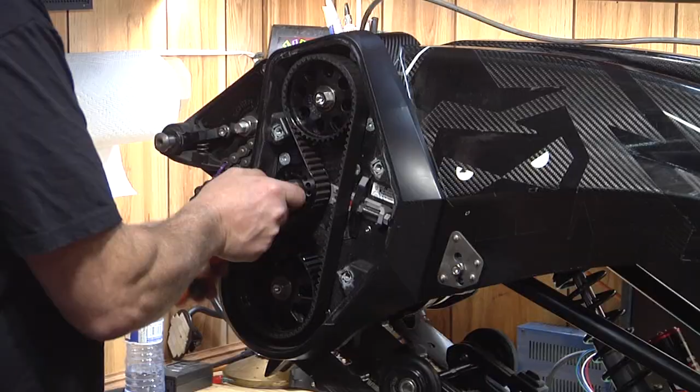Loosen the nut on the wheel. And then with our 12 mil wrench, loosen off our lock nut. Okay, I just had a crappy wrench there, guys. And then back this off, loosen it up. Okay, and now we can slip our belt off.

It's a great time to inspect the belt. So, just kind of having a look over it, making sure there's no cracks. And then the inside, no abnormal wear on the ribs, all that stuff. Yeah, so we're looking good. That's good.

Okay, now besides whatever the chain is keeping on tension, this will pretty much freewheel. So with that sitting like so, we're going to put on these clamps. The great thing about these clutch basket clamps is they do fit in well. You don't want to over tighten them. You just want to hold it in place.

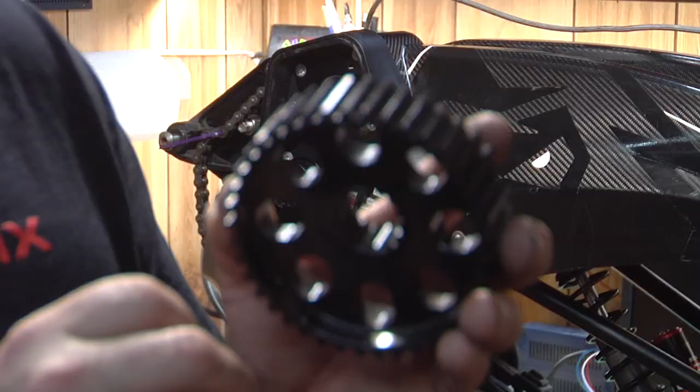When it's not looking good, the teeth start to spur a little bit, and on some of these, it's not painted, I can't remember the process, but you'll see it starting to wear down. You'll start seeing the aluminum coming back through. Yeah. So, but it looks great. It looks perfect. So this can be used again.

I found an old sprocket here. I want to kind of show you guys what a worn out, not fully worn out, but signs of it breaking down or having issues looks like. I hope this camera can pick it up. You see all the divots and the scrape marks and everything on this thing?

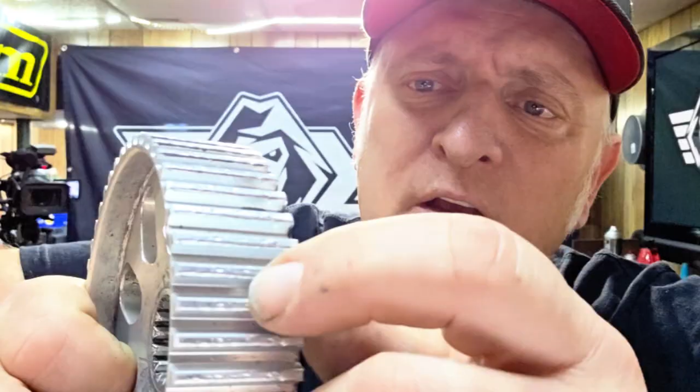So either something got in there when I broke a deflector case, or back in the day when they used to make them not as durable as they do now, or when I used to smash and bash through rocks when I probably shouldn't have. I got something in there between the belt and the pulley, and that caused a little bit of damage.

So, would I use this again? I would, if I were to clean it off and make sure that there were no rough edges to cut the belt or do any damage to the belt. The belts are expensive and they're proprietary, but that's definitely not how it's supposed to look. It should be smooth and perfect, like the black one I showed you earlier on.

So the next step here, guys, is we're going to use this special Yeti puller, put it on here, and that's going to help separate the drive plate, I think it's called, from the body. Before we do that, we've got to take all the drive plate screws out. There's 1, 2, 3, 4, 5, 6, 7 of them. So let's get them out. And chances are they're Loctited in as well, so you might have to heat them up.

I like to try to loosen everything with a ratchet before I get my power tools in there. The power tools are nice. They make things go fast, but they can also strip pretty easily and cause damage if you're not careful. And just to get it out of my way, I'm going to remove my tensioner wheel here.

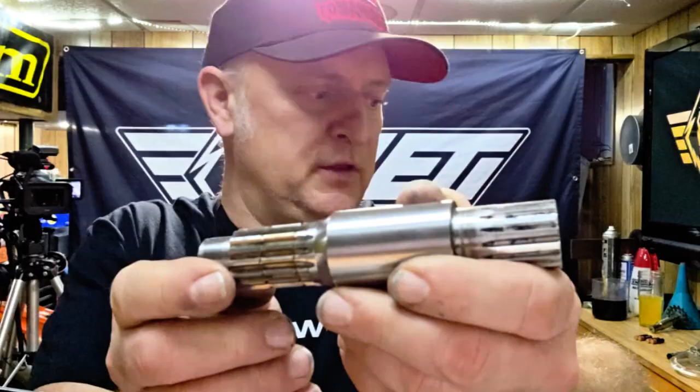Okay. All right. So now we're ready to pull the plate off of the actual jack shaft itself. The bearing is pressed onto the end of this shaft here that goes to the outside, and it needs a lot of force to get it off. So you can't just loosen the drive plate and expect to yank it off the shaft.

Okay, so this is what the puller looks like. They do show this on the YetiSnowMX video page I was talking about earlier on, the older one, and they do show you how to use it. So if my instruction isn't quite floating your boat, you can always check theirs out.

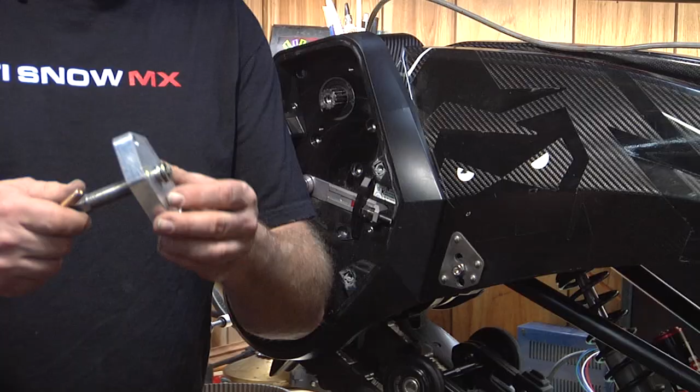So the way this works, guys, is back off your adjuster almost all the way, or not quite. Make sure that you've installed the little bearing system on the end, along with that little 8mm bolt head. That's just so when you turn it, it doesn't grind into the jack shaft, and it'll actually kind of spin and make it a little bit easier for you to work with.

And then take two of your shorter bolts here, like so, with the two holes that are threaded in there that don't hold in the bolts that hold in the drive plate, the one above and below on an angle of the jack shaft. You want to thread these bolts in as far as they'll go. Basically, we're bottoming them out. Okay, and now that's done, we got a little bit of play here.

Just tighten up your adjuster, and then with the appropriate socket, in theory, we should just be able to crank on that clockwise, and it should start pulling the drive plate off. Here we go. There's gonna be a lot of cracking, a lot of popping going on. It's okay. And like so, the drive plate is off and nothing's damaged. All is good in the world.

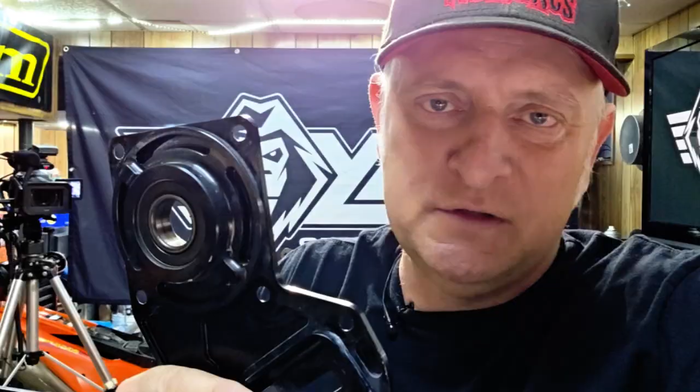So talking about a visual inspection, I'm looking at the black seal on the outside. There's also another one on the other side. These are supposed to be waterproof bearings, so if snow and stuff gets in there, it doesn't rust out the bearings. They're already pre-lubricated. And then I'll stick my thumb in there, and I'll rotate it, and I'll listen and feel if there's a grinding sound or a grinding feel. It's perfect. It's good. If there is none of that, you're good to go. If there's some of that, you're not so good to go.

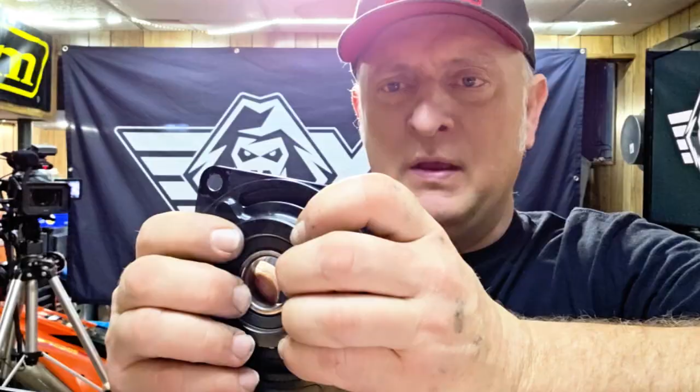Obviously abnormal wear and play, but if you were able to get play out of the center of this bearing, chances are it's making a lot of noise. It's really hard to spin. So super smooth rotation and no grinding or any type of chunk feel to it. So we're good to go. That bearing should be fine.

If you were to replace the bearing, it is kind of pressed in there, guys. You could probably put it in a vise with some sockets and press it out, but you'll need to remove the circlip that's in there. You just need some circlip tools, but that's not for this video. And there's tons of videos out there where you can find out how to pull a bearing from something.

Okay, so what we're left with now, guys, is the jack shaft just hanging there in the carbon fiber tunnel. Yeah, there's quite a bit of play on that sprocket. Like in our other video, this sprocket on the jack shaft shouldn't have any play, and it's going knock, knock, knock. So it is a wear point. I have three Yetis now, a 16, 20, and a 22, and they all kind of do that. It's like the sprockets on your dirt bike with your chain. It's just going to wear out.

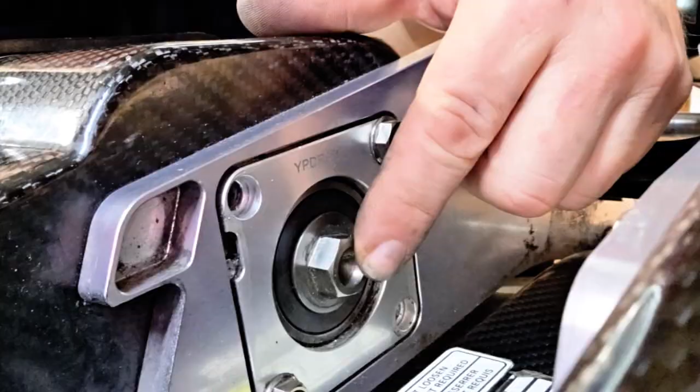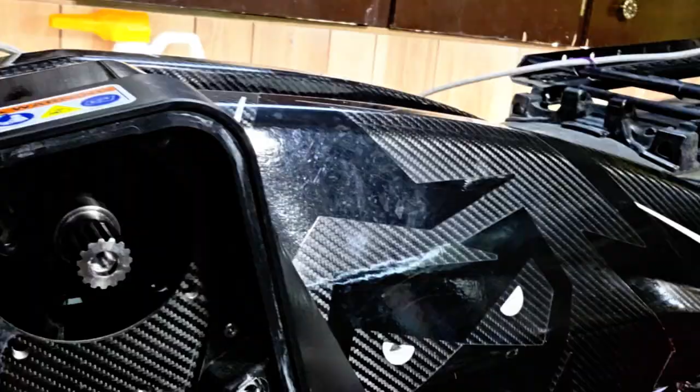Okay, so we have found our first problem. Theoretically, when we've got the nut here on the inside holding the jack shaft in place, and the chain's off it, so there's nothing binding anything or holding anything together, that in here should rotate quite easily, with no effort. I'm having a really hard time rotating that. And that should not sound like that. So we have a problem.

Now, it could be a couple different things. Without a flashlight, I'm not going to be able to see. But we could have a bad bearing. Maybe a clip has fallen off, but it kind of feels like a bearing. You can hear all that rattling. Hear that ringing noise? That's how loose that sprocket is on the jack shaft. So that doesn't help at all. I think the bearing's shot.

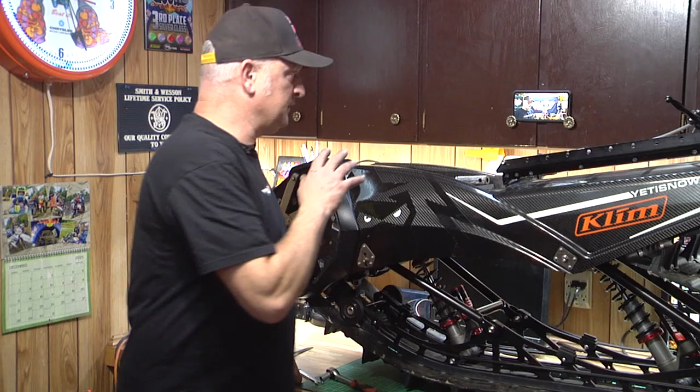So we still need to hold it in place to get the bolt off. Okay, so after a bit of messing around here, I have been able to kind of figure out how to do this and start to break it loose. So I definitely needed to get myself a longer breaker bar, and then putting one of the belt sprockets back onto my Motion Pro clutch basket holder. I took the Motion Pro and I put it about there so I can get a good hand on it.

Being careful that when I start loosening the other side, I'm not pinching my hand in the system here. And then getting this in a good angle off the back bolt. And then doing my best to hold on to this thing. Yeti t-shirt, give me strength. Okay, and there we go, guys. So that's loose to the point now where I can definitely put it on my other ratchet and get that bolt out.

You can tell it's Loctite. You know how you get that feel, like it's tight the whole way out. That's Loctite. Now, because I think I've discovered that this bearing is shot, I could have probably thrown some heat on it, and I might have not needed the breaker bar. But I like to pretend the bearing is actually in good shape. And again, if I were to apply heat to it, it probably would have warped the outer seal and caused it to leak, get moisture in there, rust out, and bad things happen.

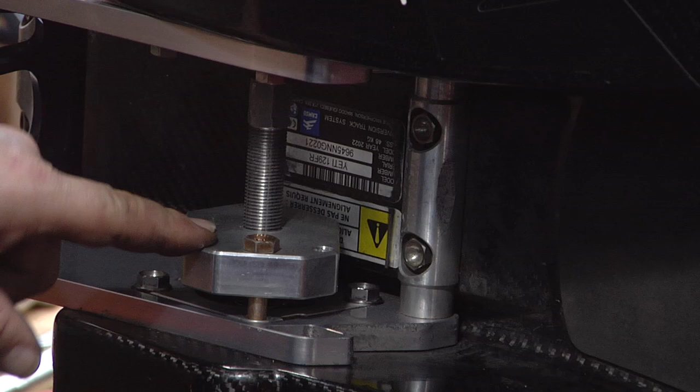Okay, so we're out. So now we get that off. Let's pull this back down. We're now going to take our puller / pusher and get it into place here so we can push that jack shaft out of that bearing. Okay, so now that I got that in there, I'm basically just making sure that the removal plate is pretty even. It's not crooked or anything. It's in there nice. Then I'm going to tighten this down. And then with a 16mm wrench, I'm going to push that shaft out.

Again, there's going to be a lot of cracking noises. It's all good. At least the cracking noises that you're hearing in this video. And you'll know you have it out when the jack shaft just falls out the other side. Okay, I heard it drop. We can remove our system here. Okay, so instead of, yeah, look at that, eh? All right, let's stand this back up.

So instead of just pushing the shaft off the bearing, it pushed the bearing out of the holder. And it's quite clear that with the rotation of this bearing, it is totally and utterly done for. So the next thing we have to do is focus on getting this bearing off, and then taking this apart if we want to is fine. But I need the circlips that are in here. There's these tiny little circlips right there that hold this gear in place. I need those clips. So in order to get those clips, I got to take the bearing off.

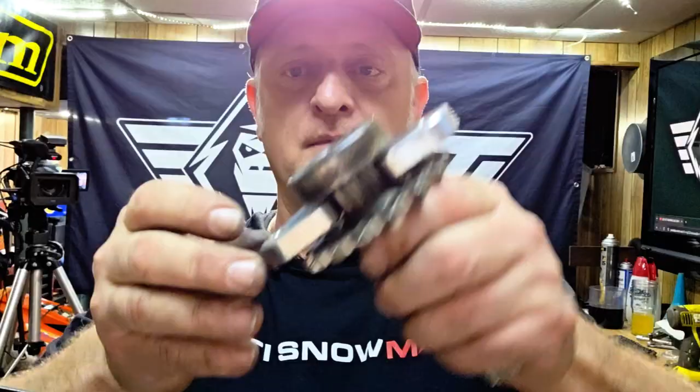In order to get the bearing off, it's pretty simple. With your Yeti bearing puller kit, you've got this little piece, and it's pretty easy. You're just going to put this piece underneath the bearing like so. Okay, and then the other piece on top. Now this is where you're going to need the long bolts. These short brass bolts won't cut it. You get the 2 long bolts that came with the kit. Put them through like so. Thread them into the base.

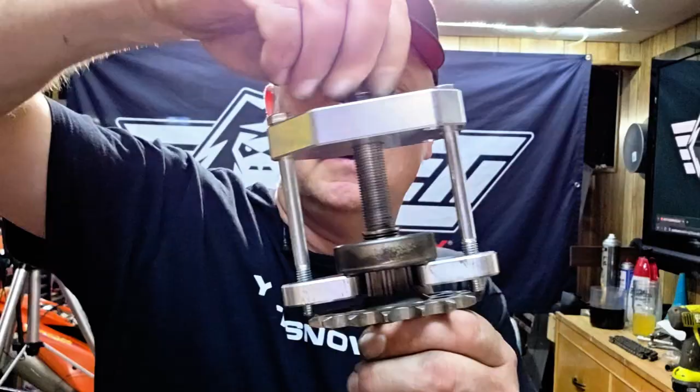I'm going to go all the way until they start popping out the bottom, or flush with the bottom, like so. Okay, and then it's a simple, actually I'm going to go further. You can't go too far because it just hits the sprocket. And then this has to get cranked up all the way. And once that's snug, now all I got to do is tighten this and it'll pull it off. I should be able to do it just by holding on to it. So let's give it a whirl. Here we go.

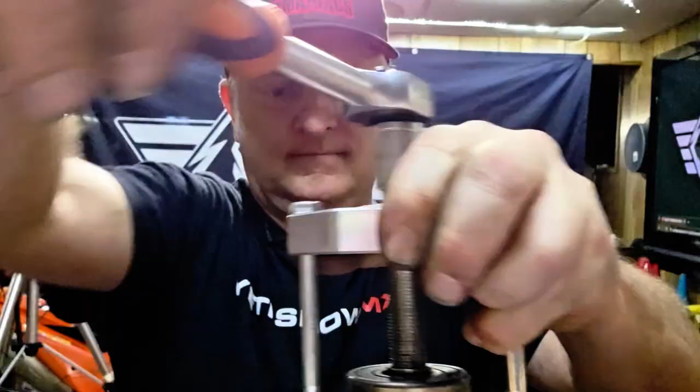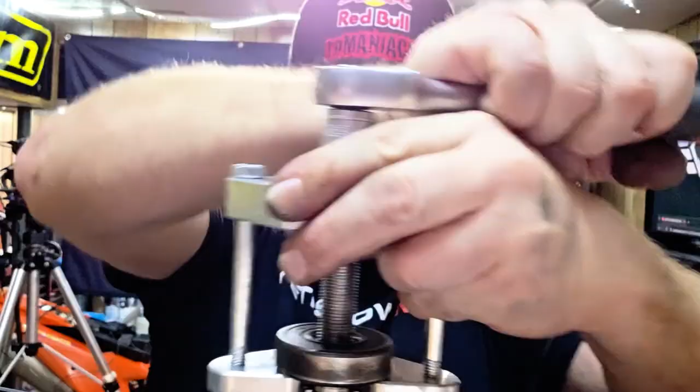Oh yeah, that works really good. Look at that. Oh, I've run out. Okay, so I've just run out of shaft here, so I just got to do a quick reset. So just back that off. Tighten up your 2 bolts on either side again. As far as she goes.

And the bearing's off. Easy peasy. Okay, smart tools from Yeti. Yeah, now I can really feel it. So it's totally, you know, grinding. So that bearing's shot. So we've got to put a new bearing on. Let's get the sprocket off next.

Okay, here we go. Just got these brand new. Can't wait to try them. My other ones were bending. Oh, how good does that work? Yes.

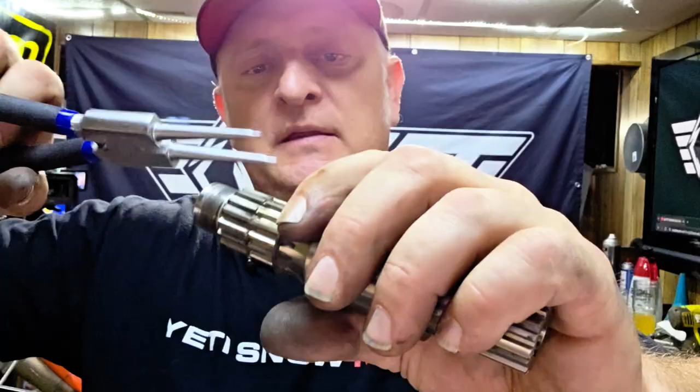Okay, and then sprocket off. So yeah, there's another retaining clip on the inside that stops it. You're going to want to take that one off as well. Inspect them, guys, but they shouldn't be damaged. Yeah, it's straight. It's good. No problems. And now this sprocket and this shaft is pretty much kaput.

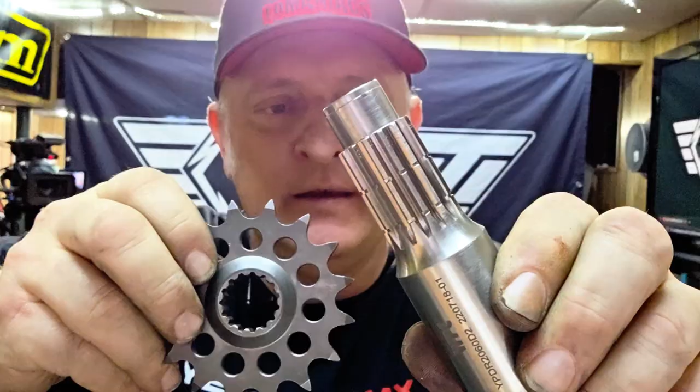All right, so now we've got our new jack shaft with our new sprocket. This is the second one I've gotten. The first one, I was actually able to marry up the sprocket quite nice, and it had pressure to slide on, but not as much as this one's giving me. I'm not sure why, but I do know that the tolerances are super tight, and it's going to take a little bit of effort to put it on.

But you need to keep it dry, because in the YetiSnowMX manual, they say that you need to apply some sleeve retainer compound. Now they put a Loctite number in their parts fiche, parts diagram manual. But if you watch our other jack shaft video, we explain that this is the equivalent. So if you can't find the Loctite, whatever number that one is, it'll show in the manual, this Permatex sleeve retainer, PX64050, will do the trick.

So before we apply that, we've got to take our circlip and put it on the first ring. Now the old YetiSnowMX video, if you're watching online, they say there's multiple grooves. It doesn't look like that's it anymore. There's two of them. One goes on the bottom, one goes on the top. Make sure that it seats in the ring. You know that it's in there because it'll spin smoothly in the channel that's meant for it.

So now we've got to get this on. It's the first time I've come across trying to put a sprocket on where it's been difficult. So I think I'm just going to try to get it as level as possible. The way I'm going to do it is put a big socket on the top while I hold this down in the vise with some soft jaws and tap on it evenly to get it to go down even, instead of hitting one side, hitting the other, and rocking it. I think that would just wear out the splines prematurely.

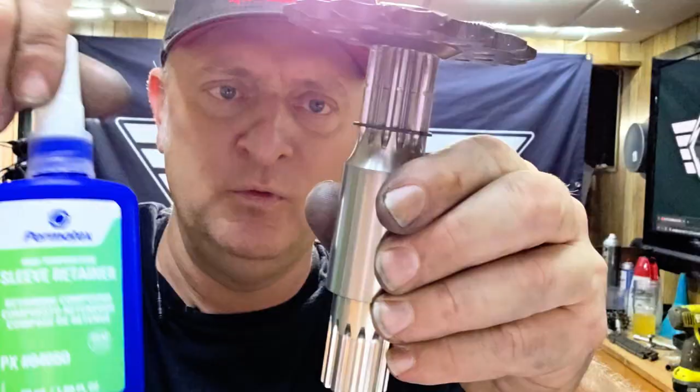Just before I get it into place, I'll apply this sleeve retainer to the inside. In this case, because it's so tight, I'm going to soak it, really get it in there. Okay, so I've got the sleeve retainer in there, it's dripping. I'm going to let it try to flow down through the channels a bit, see it pooling. Get it in there. I'm going to add a little bit to the top. See if I can get it to start seeping its way down.

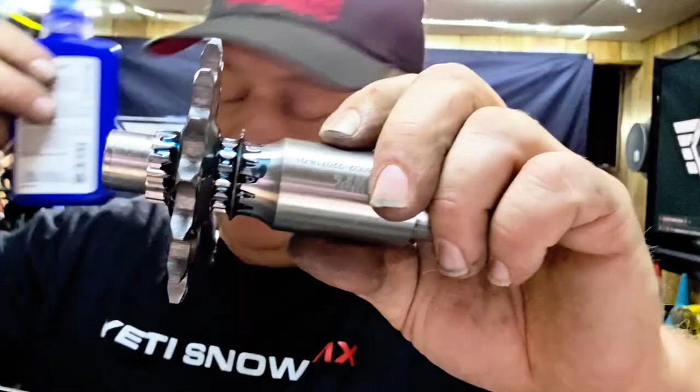I'm not quite in all the way, far enough, but I'm damn close. And I want to make sure this stuff's in here. So I'll use a little bit too much because I'm never going to use it for anything else, and then I'll be sure that it's in there and it's working the way it should. Okay, so we're looking good.

Now I know I'm in place because I can see that the gear is perfectly married up at the bottom of the circlip. So now all I should have to do is get this other circlip in place, get it back in there, push it down until it clicks into place, and I can feel that one spin on there nicely. Ever so evenly. And now, zero play, nice and tight, ready to get put back on the machine.

Okay, so for the units that require the alignment, don't quote me on this, but I've got a feeling it's 2018 and up. Maybe some later production 17s, but I think it's 18 and up. That's when you have the floating bearing system or the alignment carrier. I'll show this to you guys. Let's see if I can get this.

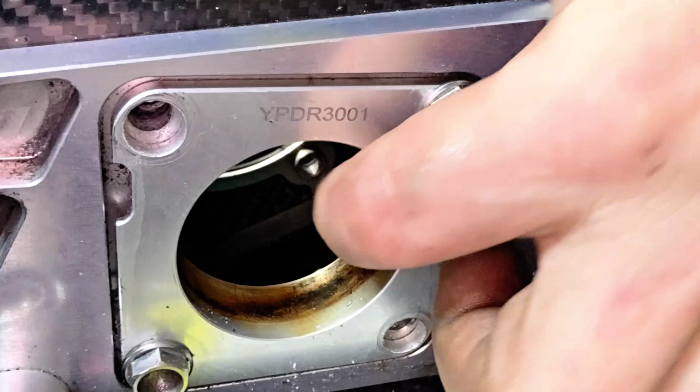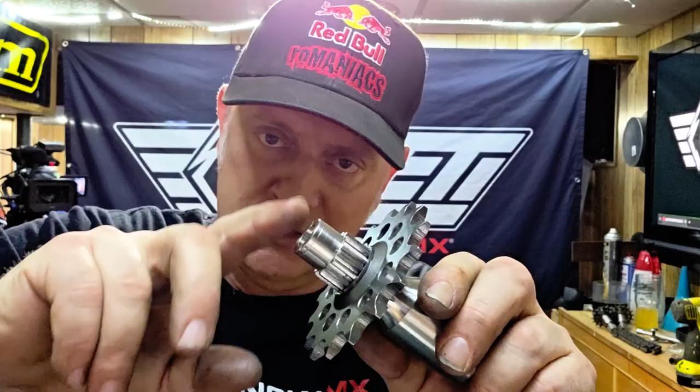Okay, so this housing here for the bearing, in older units there was a sleeve at the back that would stop the bearing from pulling through. So when I pushed this through to release the jack shaft, obviously the bearing came with it. Because I can't find any videos online that reference that, I'm going to assume that I need to install my bearing on this shaft first, bottoming out on this lip, and that's exactly how it's supposed to sit. This definitely seems like it's the perfect length to fit inside of the replacement bearing.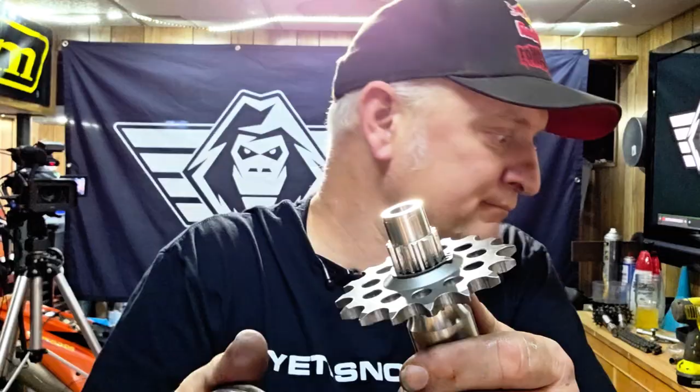So yeah, we're going to find a bearing in the kit that's new or good. And if I was spending a lot of time doing this, I would try to make the job a bit easier by putting the bearing in a warm place. Not too warm, but somewhere nice and warm. And put this in the freezer. The freezer will cause this to contract, get a little bit smaller. And then the heat will help this expand a bit. I'm not going to say it's going to drop on, but it makes it a little bit easier so you don't have to apply so much pressure to the inner side of the bearing.

We don't have time for that. We're making a video. We're going to just apply the pressure. Let's go. Let's get this bearing on the shaft. Now, there's a couple different ways you can do this. My vise is long enough where I can put both ends of these in, and the vise can squeeze, and it'll move this bearing here over and fill that gap in.

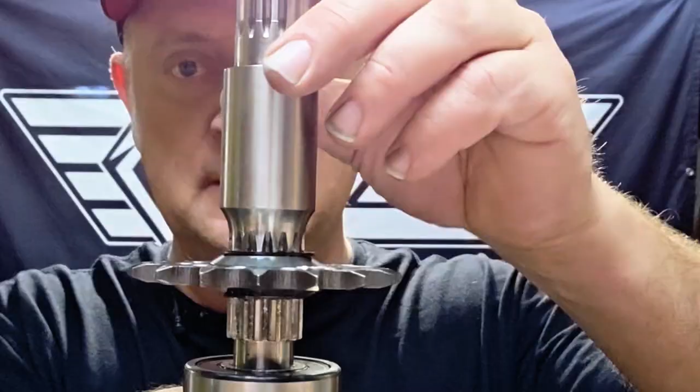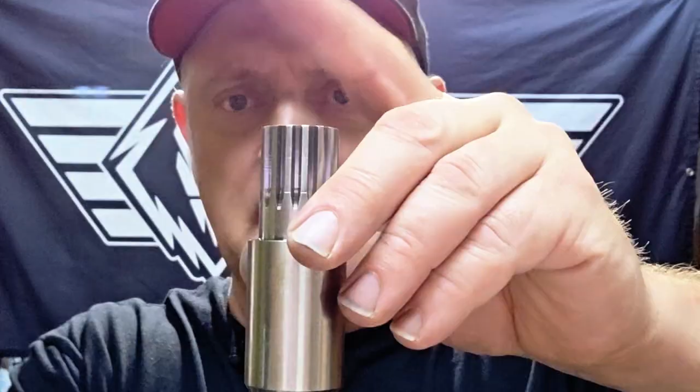If you don't have a vise that's that big, then what you can do is put it on a table like so on this flat end, maybe a block of wood on the top, and just start knocking this down. And with the levelness of the table and a good enough piece of wood and a nice swing, it's going to tap, tap, tap, tap, and push that bearing up into place.

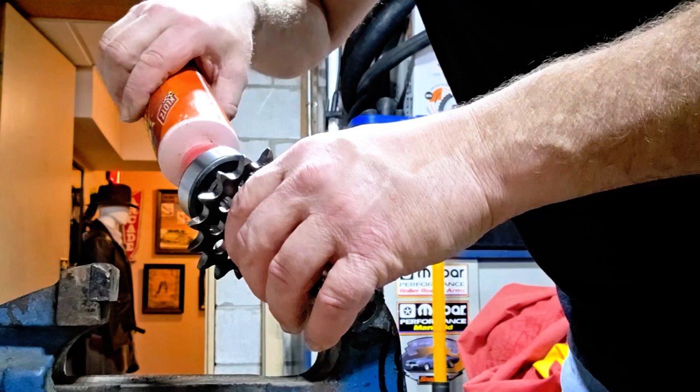So before I put this on, you don't have to do this, guys, but I like doing it because I think it's good practice. I bought a little bit of this Klotz assembly lube that I've had for a while now. I'm going to put a tiny little bit of it on the inside of the bearing and around the shaft here. It's just going to allow it to slide down and find home base a little bit easier than just metal on metal. All right. So it's lubed up nicely.

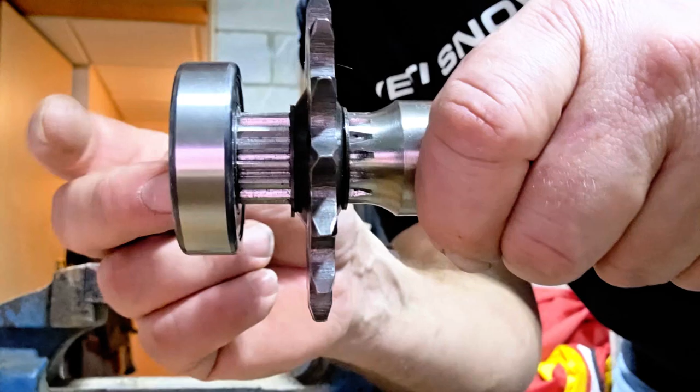And in the vise it goes. And in theory, as long as everything's straight, that vise should just push that in nicely. Yeah, that's what I want to feel. I'm just going to bottom the bearing out a bit. And now the bearing is installed and in place. So I'm putting it all the way to the edge of those splines so it can't go any further. Not squeezing too hard. So let's head back in.

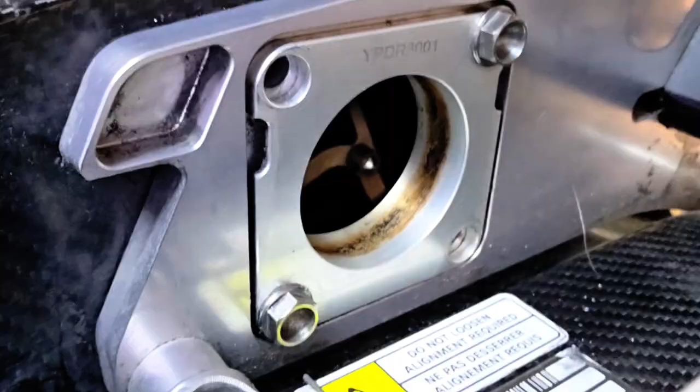So now that we have that in there, I'm going to wipe off the excess oil and we're going to get it back into place. Okay, so before we put it back into place, which is basically inside of that bearing carrier, I'm going to try to clean up some of that dirty rust that's in there. And before I try to put it in, I will need to put both these bolts back in. There will be some tapping going on to try to get this to go into place, so I want this securely mounted against the tunnel. Once the bearing's in place, we'll take this off and then we'll put in our shims and take care of the alignment process. All right, let's get this cleaned up.

I'm going to try a brake cleaner and a little bit of emery cloth. You don't want to score this. I'm talking really soft stuff. Hopefully just my toothbrush, but if that doesn't do it, it might take a little bit more. I've just taken a little bit of basically wet sandpaper. It's the stuff you're supposed to wet when you're doing that final clear coat on your car, or whatever you're finishing off.

It's extremely not abrasive. It probably won't even cut into the aluminum. It's just enough that it's taking off some of the surface rust. It's not taking off any metal. It's just cleaning it up so that the bearing will slide in nicely and seat evenly. Now this bearing doesn't need to be pressed into this hole. This hole is just machined enough that I can almost get the bearing in with my fingers. But it stops about halfway through and there's too much friction.

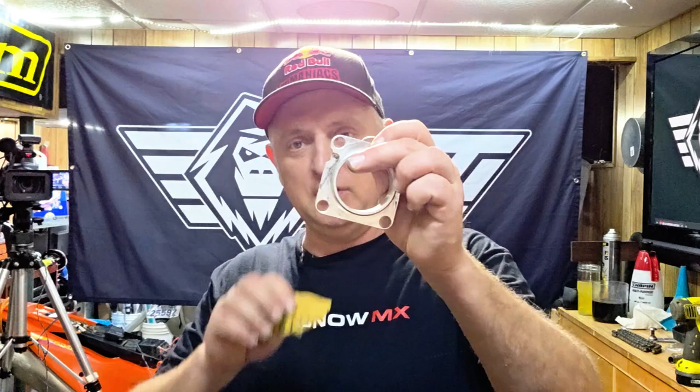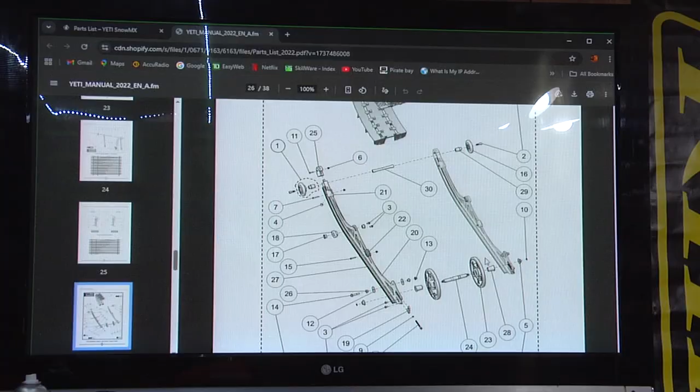But when you put the jack shaft on and start pushing it or hammering it through, it will seat nicely. The trick is not to go too far. You want it so the bearing marries up perfectly in this casing. We're just going to check the manual to find out if the bolts that hold this, let's call it the bearing carrier, in place need Loctite or not. All right, so just finding the correct page. Okay.

Yes, it definitely wants Loctite on those 4 bolts. And again, there's that symbol for that Permatex stuff that I was using. In this case, I'm pretty sure this tells you on the top what Loctite it is. Apply Loctite 648 to splines. So I just used the other stuff. So yeah, blue Loctite to number 17. So I'll do that. I'm going to clean the threads off and get them all good to go so that the Loctite can do its job, because these threads have a bunch of gunk in them still from the old Loctite.

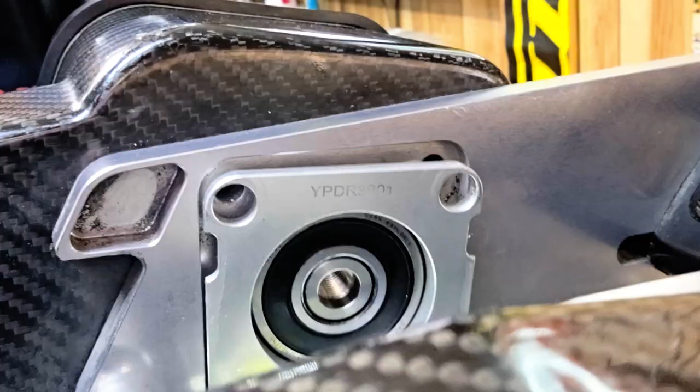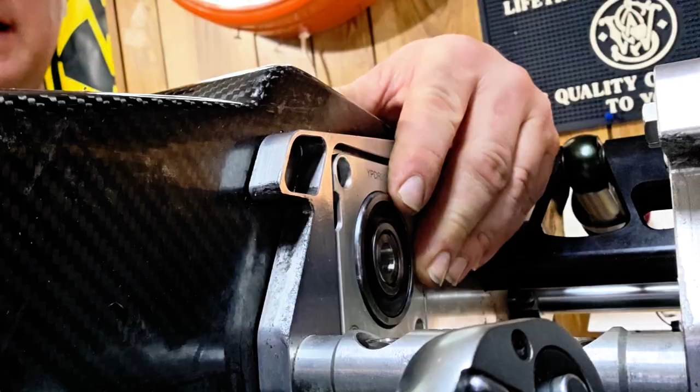Okay, so sorry I didn't show that on film. Well, I kind of did. It went in quite nicely. There was no effort at all. I just pushed it in, and that bearing fell right into place, and all is good in the world. So let's talk about what we have to do now before we mount this plate in there. I wish I could get a better angle of that. That floating bearing works, right? But this whole plate moves up and down, and this is what's going to help us align it.

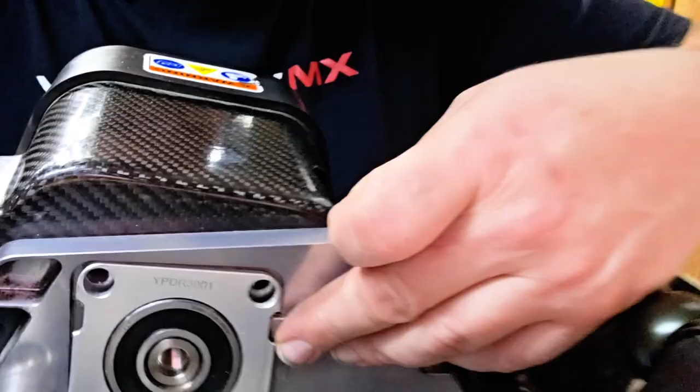So before I put the bolts back in, there are a set of very small wedges. Excuse the dirty hands there, guys. There's wedge number 1, and then there's another one that's identical. And each one of them fits in a side here, like so. They fit in behind, right? And these slots here will eventually help us set these into place. So I've got to refer to the instruction manual again to make sure I get this right, and I'll tell you guys on video how it's done in a second.

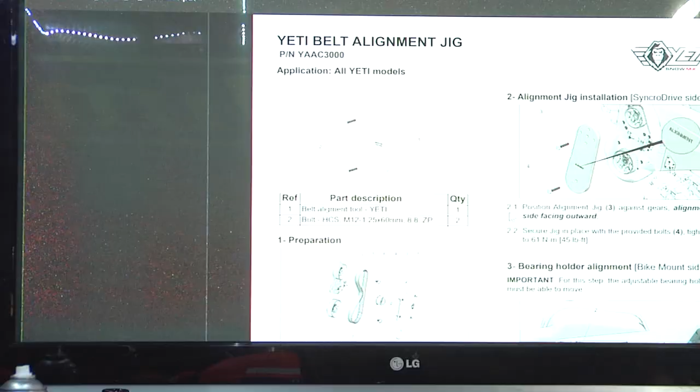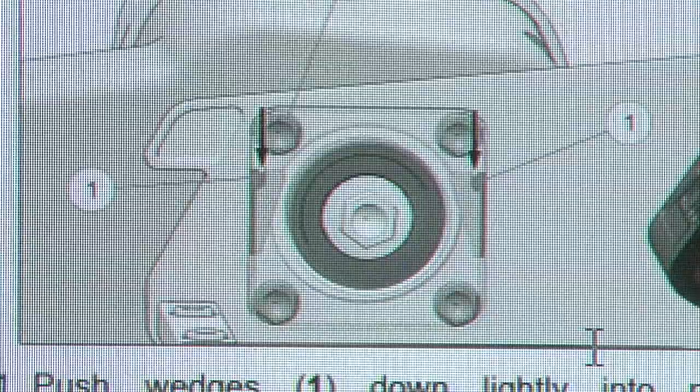Okay, so you're going to need to have on hand the tool that they call the belt alignment jig. So we'll click on that. It's this huge piece of machined, I think it's aluminum, that you use to align the belt, align the jack shaft, and it shows you these illustrations here of how the pins go in, how they work and how it lines everything up. So I'm just going to have a look over this, and then I'm going to spell it all out for you cats.

Okay, we're getting close to doing the alignment procedure. Let's show you what the alignment tool looks like. This thing. It's made to perfection. It's made by YetiSnowMX, and as you'll see in the steps, I'm going to explain how to use this. This will align your 2 drive belts. Picture a drive belt here. You can kind of see the sprocket, one here, one down here. You mount this on. There's a bunch of different steps, and it'll move that top jack shaft up and down where it needs to be in order for it to align perfectly.

And then those wedges that I was showing you earlier, the purpose of these is while you move that plate around inside the carrier, up and down, sideways, as it finds home, the wedges will slowly drop and slip and fall into place on either side. Then it will find its perfect alignment spot, and then you tighten everything up and you're good to go. Now, you do not want to add any lubrication at all to this. Any lubrication will cause these to stick.

You want it totally bone dry in there with no lube so that this aluminum can slip up and down easily into place. If you were to have any type of dirt in there, you could definitely use these little pin holes in the top to put a poker in to help push it down once the whole thing's aligned and jigged. But I'm going to leave it not lubricated and allow them to slip and slide inside as easily as possible, so the oil doesn't hang it up against the side of the wall and stop it from slipping into place.

So this is where it gets a little tricky, trying to get everything lined into place. We're going to get the 4 bolts started in here, and we'll be right back with a camera shot. There's a backing plate in there. Don't forget this. That goes up against the back inside the tunnel, right in here, all the way in there. And that's what the screws hold on to, these little aluminum sections. I know some units might have a different look to them, but this one here is slightly tweaked. It's not ideal. Should be okay.

So I'm just starting the bolts a little bit, just so a few threads are holding on until I get them all 4 in place. Okay, now that I got some tension, just a bit of tension on those bolts in the plate there.

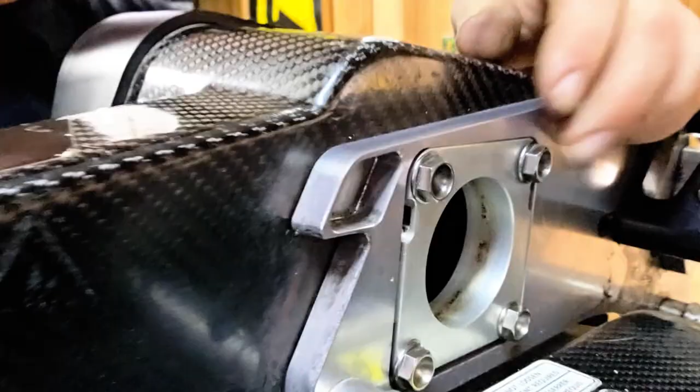Okay, here. I'm actually going to lay it on its side, and I'm going to take a little poker and try to move those sliders up inside and put them up a little bit higher so that they can do their job with the alignment jig. This has become one of my best tools I have in my box.

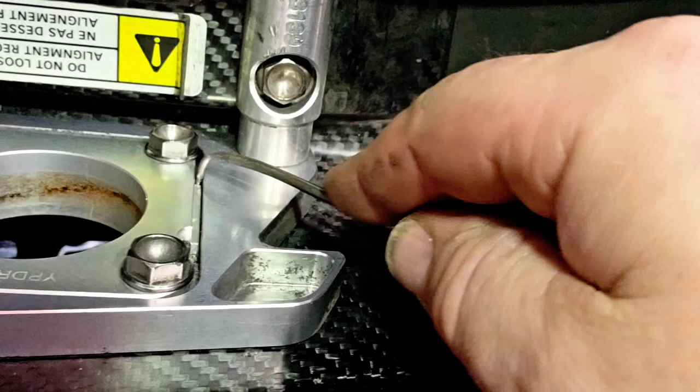And then, let's see if you guys can see this. And take these, slide that one up into place. That one, slide that up into place. I hope you guys could see that, what I did there. So these go up and down, right? The wedges, they help it find a home. Should have done that. There.

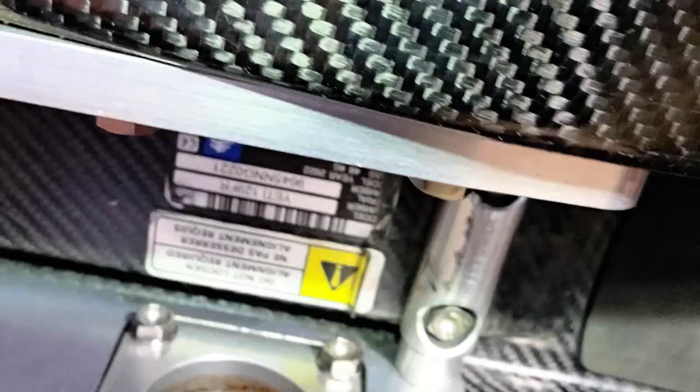Okay, I'm going to start them in the top position. And then all I'm going to do is I'm just going to snug this down to hold those in place until I get my jack shaft in there. And then we'll loosen and then put the alignment jig on there. So that way it holds those little pins in place while I move the kit around.

Well, I guess with it tight in there, it's definitely closed up the gap a bit. Oh, no, there we go. Okay, perfect. Never mind, didn't say a word. Okay.

I'm going to take my bolt and I'm going to secure it to the back of my unit. Of course, with the Loctite that it recommends. Yes, Loctite at 61 Newton meters, that's pretty tight. We'll torque it up after, but we'll get the Loctite in there. Okay, and then in order to get it to 61 Newton meters, I can probably do that with the alignment jig. Yeah, we'll wait till we get the alignment jig in place.

Okay, since we took the chain off, now is a great time to reinstall the chain while this drive plate's off. It'll be so much easier than trying to do it afterwards. It's such a pain in the ass to get these chains on sometimes. So we'll just feed it on now and life will be so much better. That's how it was supposed to spin in the first place.

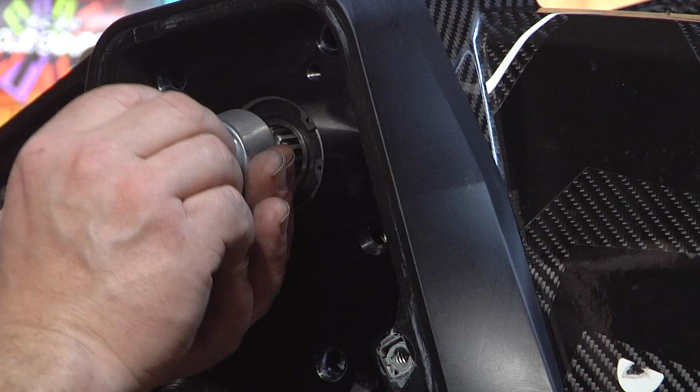So in order to get this pulled back through, basically the way that this tool works is we put the nut first on the bolt, like so. Okay, then the washer, then the collar, like so. Okay. And then on here, the drive plate's just resting there without any bolts in place. We're going to thread that in.

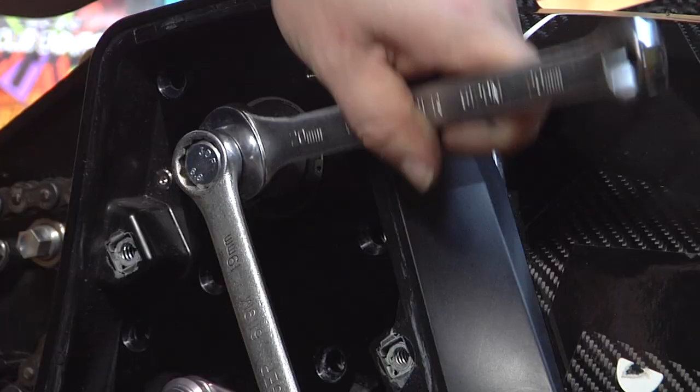And then basically when we tighten the nut and hold the outside bolt from rotating, it's going to pull the whole thing together through the bearing. Like so. We're just going to hold this side while we tighten it in. So I'm just going to loosen it to show you the progress so far.

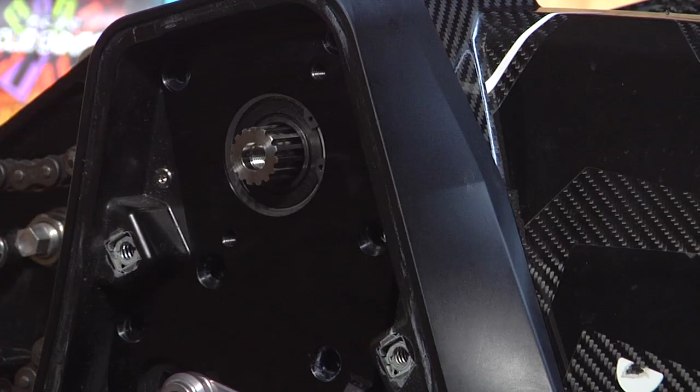Now as you can see, it's starting to pull it through the spline. So it's doing it nice and evenly. And just so you know, that bearing will eventually bottom out on this side of the shaft, up against there. Okay.

Okay, so it's gotten tight. It's definitely bottomed out. And the way that you can double check that it is sitting in the right spot is if you take your belt sprocket here along with your washer that goes behind it. Don't forget that. And then put the drive gear on. It should be perfectly flat and flush with the gear, so that there isn't any sticking out and it's not recessed in. Again, this is that fine machining that I was talking about in all my videos about YetiSnowMX. Really great stuff. You put it together properly, everything works properly.

Okay, so now that that's done, we can install our drive plate back into place. And the drive plate screws are going to be 25 Newton meters. I'm going to stagger them. And now it is time for the alignment process.

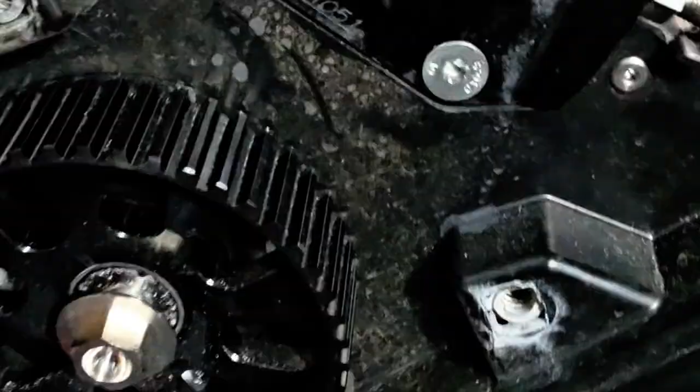Okay, before I take that out, I'm just going to run it in and out a few times with the drill, just to break up the Loctite that's in there and turn it to dust, and it's easier to clean afterwards. You can see it flying out. Just bring this around so you can see. Yeah, it's all Loctite, right? So again, if that didn't come out by hand, it's probably because maybe someone used red instead of blue, and you'd have to heat it up. So anyways, that's off. If you have an impact gun, you can use that as well, but I kind of wanted to do this video without using any major power tools, like impact guns.

Okay, so those are off, and next step is we're going to loosen the 4 bolts on the back of the jack shaft plate. These right here. They just need to be loose. That system in there needs to float around. Okay, so there we go. All's good in the world.

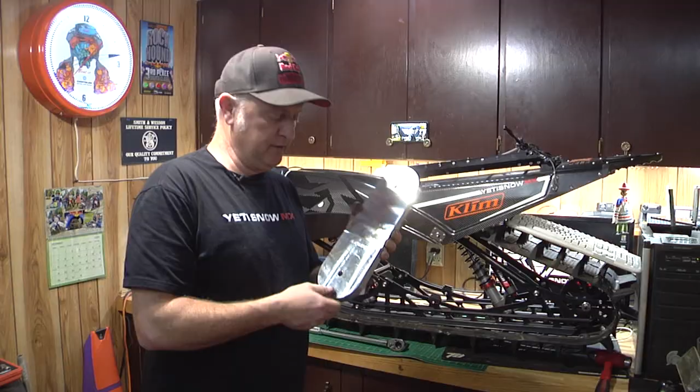Now, next up with your alignment tool is with the 2 big bolts that it came with and the side that says alignment on it. So you got one side that says inspection, and then the other side you have alignment. You want to take the alignment side. These drive sprockets need to be in place. Sorry guys. Just put them back on. Okay. We basically need to bolt it into place like so. So let's get that in there. With the alignment side out, you thread it into your jack shaft and your drive shaft with the sprockets on and in place.

Okay, then we're going to tighten these bolts down into place at 61 Newton meters, which is 45 foot-pounds of torque. Okay, so we're at 45 foot-pounds of torque on both of those. Before we go on with the next step of the alignment procedure, we want to make sure that back bolt that's on the jack shaft right over here is torqued up because it hasn't been tightened yet along this process. So it wants to be 61 Newton meters or 45 foot-pounds of torque. So here we go. Okay, so that's good.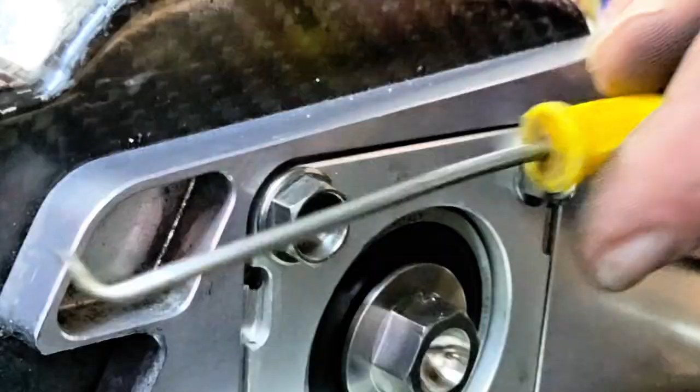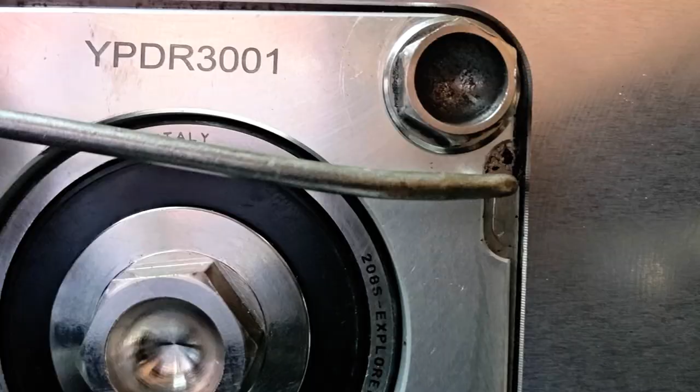Now moving on. The next step now is to take our little poker and we're going to go to the back of that jack shaft plate. And those little pins, oh, that'll work, yeah. They just need to be now pushed down into place ever so gently. If that's not moving freely, the plate's too tight. So we're going to loosen the 4 bolts a bit more. There we go. So it says to take these and push them down slightly without applying much force, so they just fall into place. So that's looking good on that side.

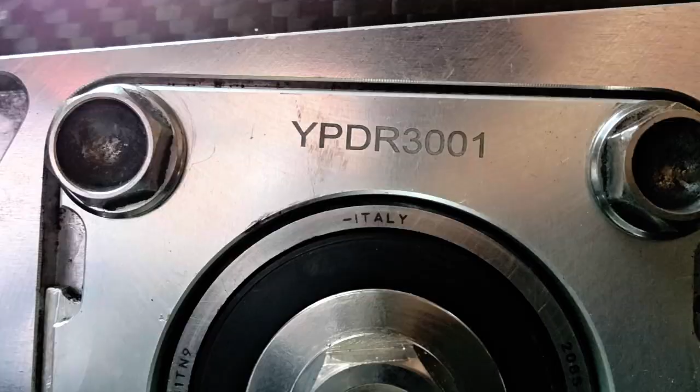There we go. Oh, there we go. Get a bit more going on there. Not a lot of force, just a little bit. Should have cleaned that up a bit more in there, but we'll get her. Okay, so they're in place. Next step is now tighten all 4 of these bolts up to torque spec, which is 25 Newton meters, which is 18 foot-pounds.

Okay, they're all torqued down. The next step is to take a small punch and punch down the wedges for their final resting position. So you're not hammering the daylights out of them, just some. And if they move, great. If they don't, that's okay too. So let's find a small punch. You can probably use a tiny screwdriver, but you might do damage to it.

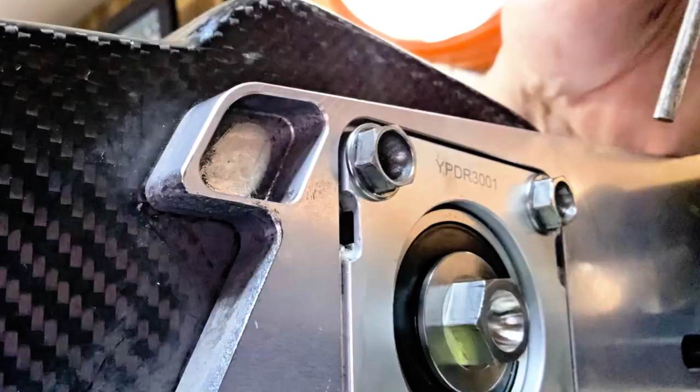You want a flat end punch, not like a pin that you would use for making a pilot hole. That's good. Okay, now we're in place. Next step is we're going to take the plate off because we're going to have to turn it around for the next part of the alignment. And this is like the confirmation inspection section of it, where you're confirming that everything was perfect.

And the next step, we need to just install the top synchro drive belt drive sprocket. This is the last time you're putting this in, guys, hopefully. And so you can Loctite it up now. Some blue Loctite. Make sure the bolt's evenly coated, and this is important that this gets done right.

There's a lot of spinning and force on this, and without it Loctited, it's very easy to come loose on you and cause problems. And then once it's in place, you want to lock that down to 61 Newton meters or 45 foot-pounds torque.

Now, you're not going to be able to get this torqued down into place, guys, without holding it in place. I have tried doing this by holding the brake on and trying to hold the track and all the rest of that jazz. I was not successful with it. There we go. Easy peasy with the right tools. Just gonna wipe off that Loctite that dripped down.

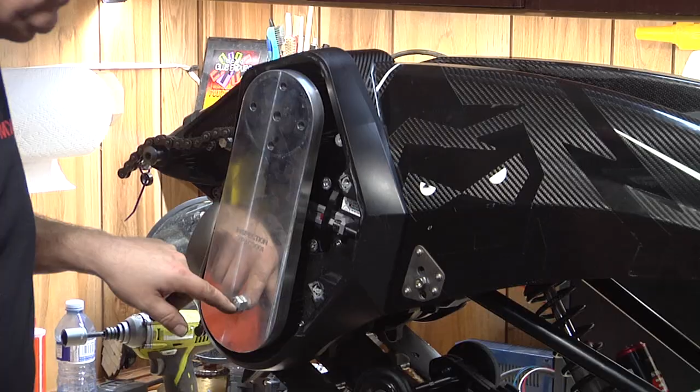Okay, now we take our alignment jig, with the side saying inspection on it facing out. And we only use one of the bolts to put it into the bottom synchro drive gear. Just get it started for now. Okay, we want to torque this down now to the exact same torque specs as before. Might have to hold it in place.

Okay, there we go. Try not to pinch your fingers, and then rotate this so that it is basically in line with the top synchro drive sprocket, or belt drive gear. And then you want to align the spokes, here, we'll look at the gear so we can talk about it. So you want to basically align this sprocket here, guys.

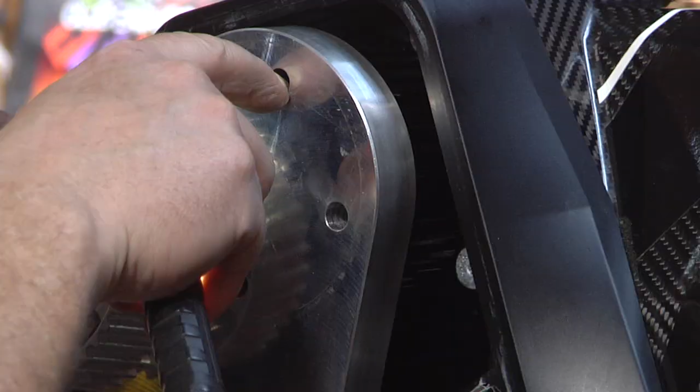We'll just zoom in so that the holes in this sprocket do not line up with the holes in the adjustment plate. You want the holes to hit the actual centerpiece here, because we're going to use a tool to measure through the hole into the side of this gear. So not the hole, but the side of the gear. I hope that makes sense.

And just rotate it. You can probably stick something in there. Yeah, that's not right. Okay, that's good. Now, this next step needs a special tool, not one your average backyard mechanic might have: a vernier caliper. So this unit right here is used for measuring distances and tight tolerances.

So this is a digital one that when I open it up, it changes a number. Wait a minute. Yeah. And as I go bigger, it gives me a bigger distance. And I can put this in metric or imperial, whatever you want to call it. In other words, we need to use this, and it's actually this end right here that pokes out when I open this up that we're going to use.

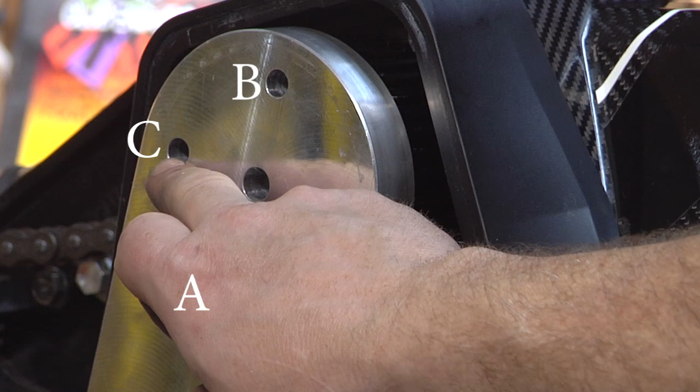Okay, so we've got different holes here. So for the video, hopefully I can make this work. The bottom is hole A, and then hole B, hole C, and hole D. First thing we need to do is measure the distance between the back of the sprocket that's in behind here to the front of the inspection plate using a vernier caliper, this guy here.

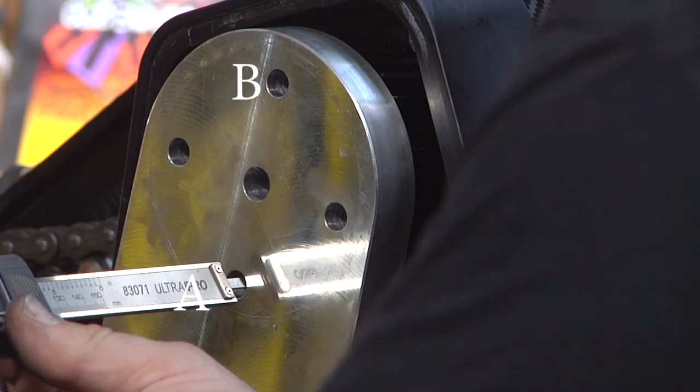Take the vernier caliper and put it in until it bottoms out, and then set it against the plate, and then hit the zero so that it reads 0 and lock it down. So that depth there is now set to 0, whatever that might be. Then you go ahead to hole B, this one up here, and measure the difference between the distances in hole A and hole B.

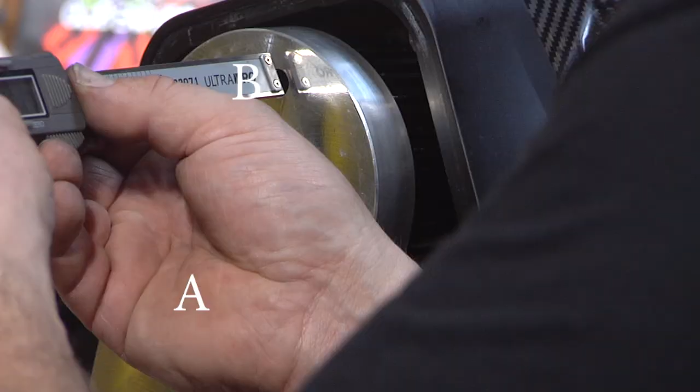So in order to do that, I'm going to unlock it, put it in and find out what that distance is. Okay, so we're doing really good. We're 0.08. So is that in spec? Based on Yeti's recommendations, A and B should be no further apart than 0.25 millimeters. So 0.08, I am well in spec. That's awesome. Now we're going to check C and D.

Those tolerances are tighter. Those ones need to be within 0.13 millimeters. So I'm going to check that now, doing the exact same procedure. So step 1, off to the side, right? I'm going to zero it out. And now measure the other side.

And I'm 0.05. Looking good. We're in line. So the procedure worked, and that jack shaft is all aligned. And now to finish off the process, we just remove our alignment tool.

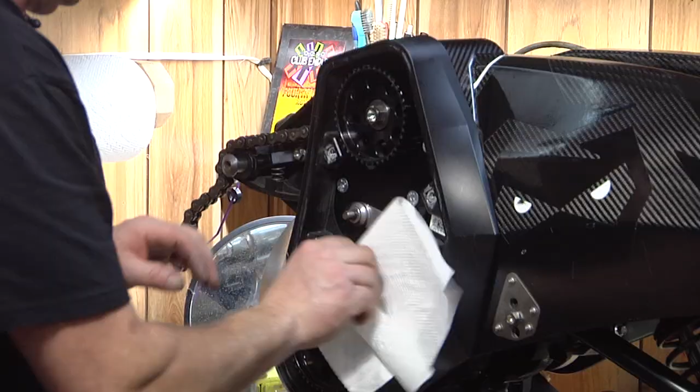Some cleaner. So when you're inspecting the inside of this, guys, really what you're looking for is shavings of belt, rubber, or sometimes you get these silver metallic shavings, especially if your gears aren't aligned. And that's why they did that update. So on the older models, guys, you want to be mindful of that. I'm just cleaning some old Loctite that came out of the channel here, but this is looking really good. Super clean. I like that.

And then we put our belt back on. So step number one is we'll just place our wheel tightener back in and just loosely put that on. Move this shaft back and forth. And as soon as this bolt gets tight, that won't shift back and forth anymore. A bit. So that's free and clear.

We take our belt, and since we inspected our belt, it's looking good. No problems with it. We can put it back on. Use her another day. If you have a fresh belt, beginning of the season, throw her on. Use your old belt as a spare in case you have a problem. Okay, making sure that all the belt's lined in with the spokes and it's even. It's not sitting back too far. You know, that looks good. That looks good. Okay, and now we'll tighten up our set bolt here.

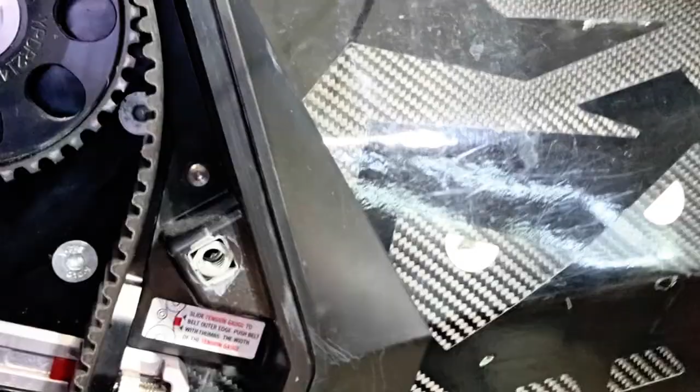Like so with a wrench. I'll pull that wheel this way. It'll tighten the belt, and then I'll show you the adjustment procedure in a second. So if you push on the wheel here, that'll definitely help you do this by hand until you get to the point where it's too tight and you have to use a wrench. The whole time just checking your belt positioning, making sure it's good. It will find home. If it's slightly off and you get it going, it will eventually center itself. Okay, so now our belt's getting a little tight.

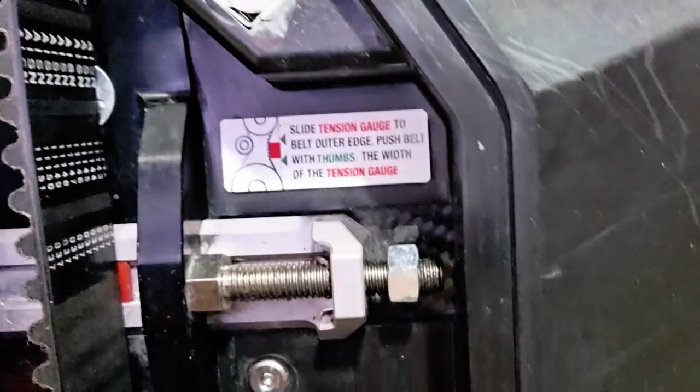So you've got this little red slidey thingy, okay, which is like an adjustment thing. So what you want to do is you want to take that and push it so it's just at the back of the belt. So that's a little too far. I'll just use this and put it forwards, like so. Now when I take the belt and push it, if I go past it or too far, it's not adjusted right. So that is a little loose. So we're just going to tighten up the belt a bit more. Let's try that. Maybe a couple more. Recenter it. Yeah, that's good. So it's in the spec of that red line, and all is good in the world.

We're going to tighten the locking nut at the back, just so it doesn't vibrate out on us, which is always good to have. And then, remembering to leave a little bit of play, okay, because when you tighten up the bolt on your adjustment wheel, your tension wheel, it will make the belt a tiny bit tighter when you square it up. And then tighten that down to spec, which in this case is 35 foot-pounds. Okay, there we go.

Reinstall your Synchro Drive by C3 Power Sports cover. And that job